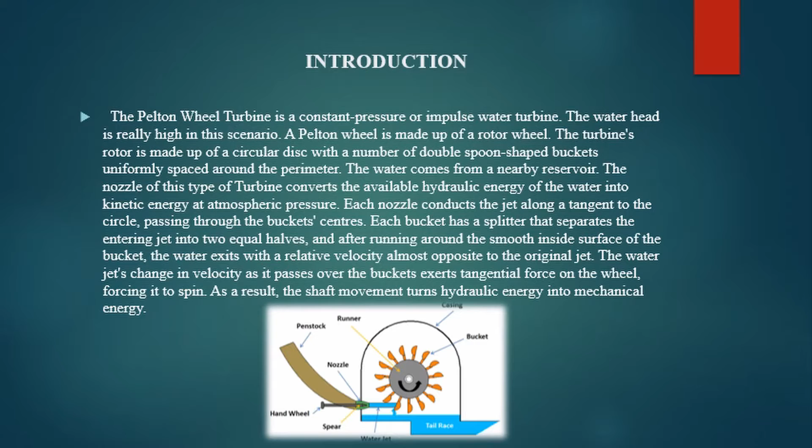For the background for this project, the UMP Fluid Mechanics Lab allows students to experiment with the Pelton wheel turbine. The goal is to expose the students to the Pelton wheel turbine's functioning component by varying the rotating speed while maintaining consistent head and flow conditions. A barometric weight is used at the channel and outflow.

Next, the information gathered will be analyzed and studied in order to arrive at a final conclusion that will validate the theory used for Pelton wheel turbines. And for the result, the findings of this study will provide students with a framework for selecting the best Pelton wheel turbine. The experiment is on a small size, but it employs the same principles as the Pelton wheel turbine used in real life.

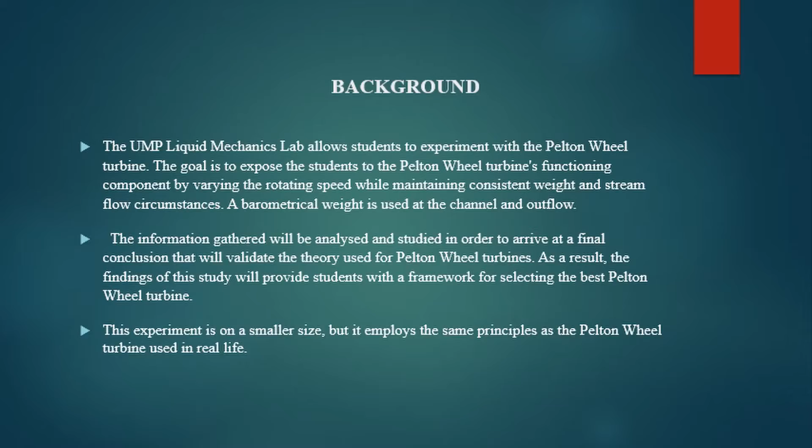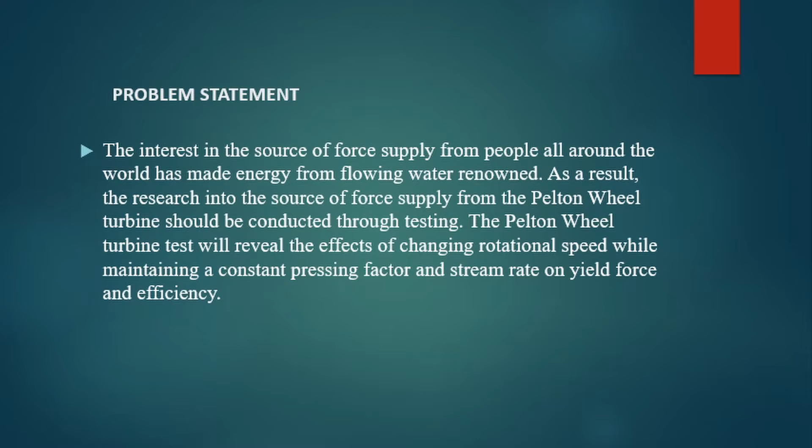And the problem statement is the interest in the source of force supply from people all around the world has made energy from flowing water renowned. As the result, the research into the source of force supply from the Pelton wheel turbine should be conducted through testing. The Pelton wheel turbine test will reveal the effects of changing rotational speed while maintaining a constant pressure factor and stream rate on yield force and efficiency.

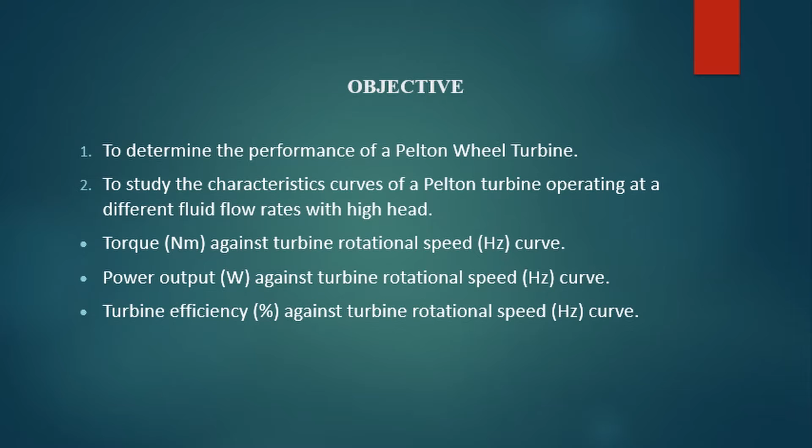And for the objective of this project, first to determine the performance of a Pelton wheel turbine, and second to study the characteristics curve of a Pelton turbine operating at different fluid flow rates with high head: torque against turbine rotational speed curve, power output against turbine rotational speed curve, and turbine efficiency against turbine rotational speed curve.

And for the scope, only a lab-scale Pelton wheel is used in this experiment. In comparison to a full-size Pelton which can create 100 million watts, this wheel would only create a little amount of electricity. That's all from me.

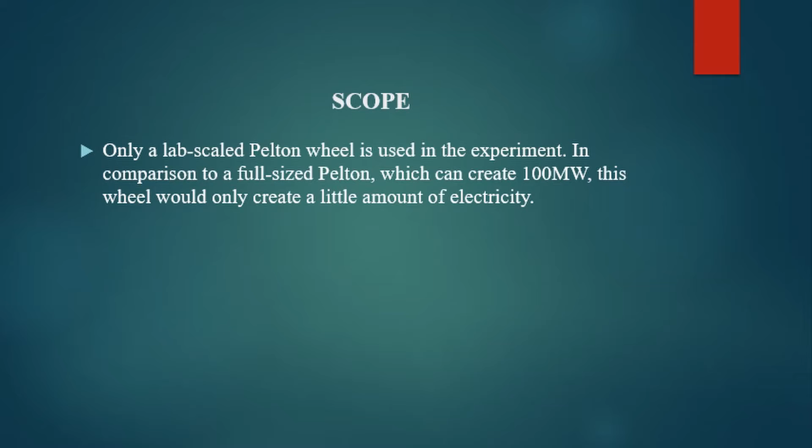So today I'm going to continue to present about the theory, method, and also the procedure. So we go through the theory first. So as we can see in the picture, the Pelton turbine is a hydraulic impulse turbine in which one or more water jets hit the buckets on the wheel. The force produced by the jet impact at the right angle to the bucket generates a torque that causes the wheel to rotate, thus producing the power.

The Pelton will need a source of water in order to run. If the head of the water is known along with the flow rate, then it is possible to find the best size of the wheel to use, how fast it should rotate to obtain the maximum efficiency, and what power it is likely to develop.

The velocity in the jet can be estimated by using the known fixed head. The diameter of the jet can be found from the known flow rate. A suitable wheel diameter can be chosen in relation to the jet. Typically, the wheel would have a diameter of 10 times the jet. The best speed of rotation may be selected such that the speed of the bucket is approximately half that of the jet speed.

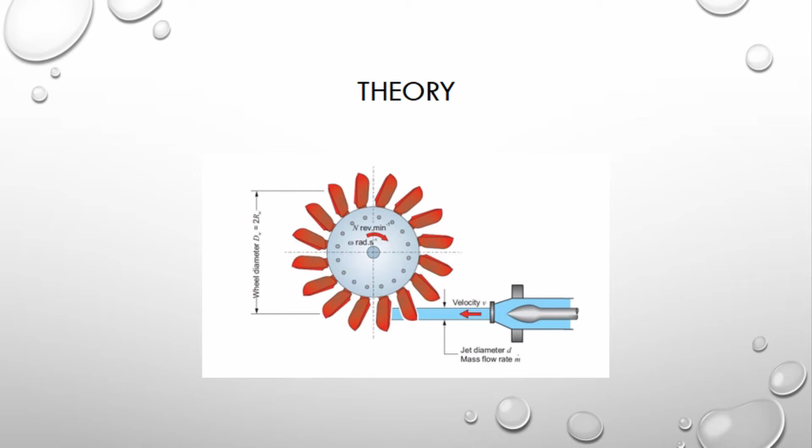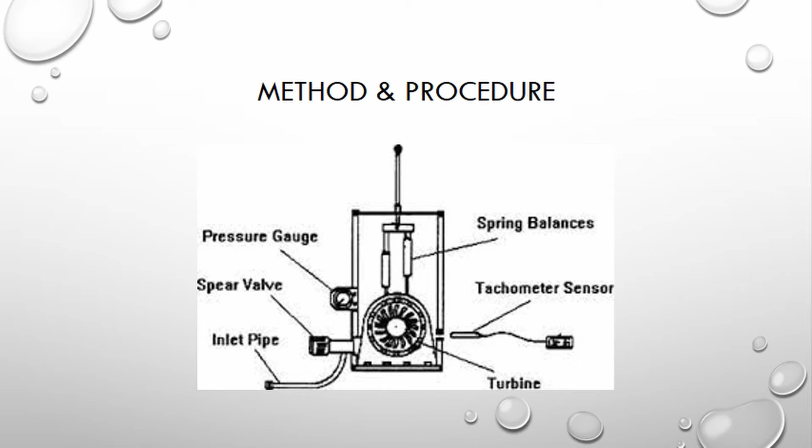So next we go to the method and also the procedure. So this is our experimental setup. We have a pressure gauge, spear valve, inlet pipe, spring balance, tachometer sensor, and also the turbine. So we go through the procedure one by one.

Firstly, prior to the beginning, every one of the water connections is checked so that there is no spillage in the hydraulic bench. Second, the spear valve is totally shut, which means we need to turn it completely clockwise. After that, start the hydraulic bench and progressively open the control valve while opening the spear regulator until the bench stream is at the maximum and the spear valve is completely open.

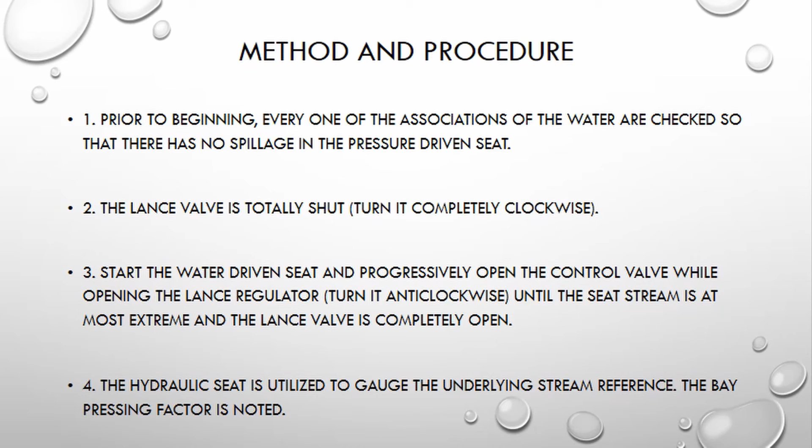Then the hydraulic bench is utilized to gauge the underlying stream reference. The inlet pressure is noted. After that, the tachometer is utilized to quantify the speed of the turbine. The tachometer is set against the clear glass at the rear of the turbine and it is utilized to identify the reflective sticker on the drum. The tachometer reading changes somewhat over time. The average rotational speed is assessed over the span of a couple of moments.

Then number 7, the volumetric flow rate is determined by stopping up the channel at the lower part of the bench. And number 8, the waterline on the bench is noted. The clock is started when the waterline arrives at 0 liters and it is stopped when it arrives at 10 liters. The volumetric flow rate is obtained by dividing the 10 liters by the time. Last but not least, the trial is repeated with decreasing RPM.

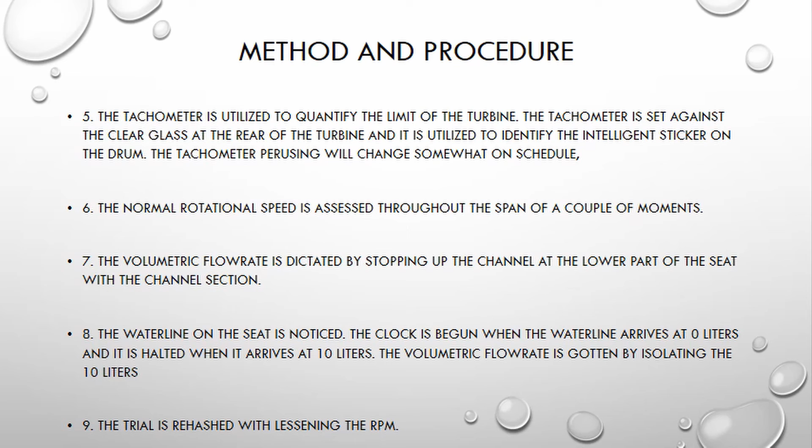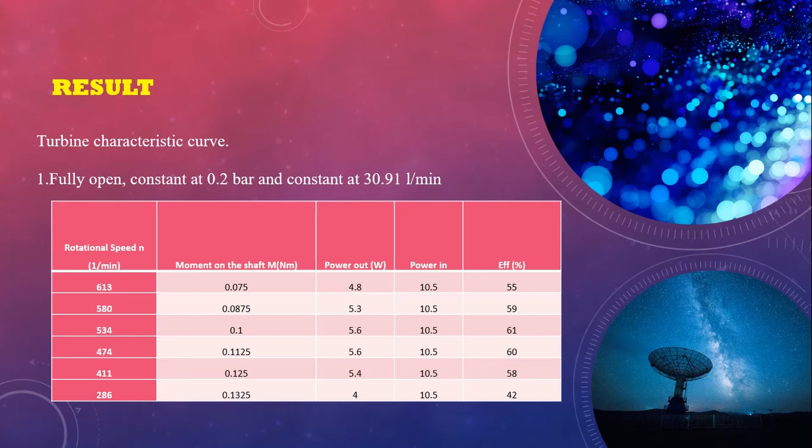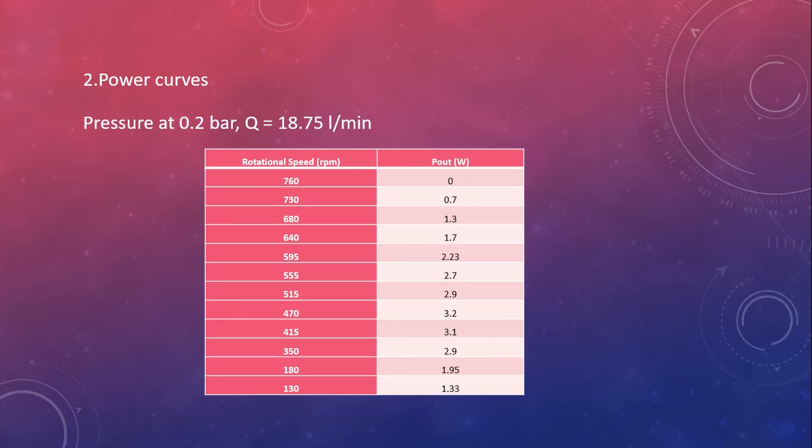Now I would like to explain the results and discussion. The first result is on the turbine characteristic curve, that is fully open, constant at 0.2 bar and constant at 30.91. The second table is about the power curve with pressure at 0.2 bar, Q equals 18.75. Now let's see the graph and discussion.

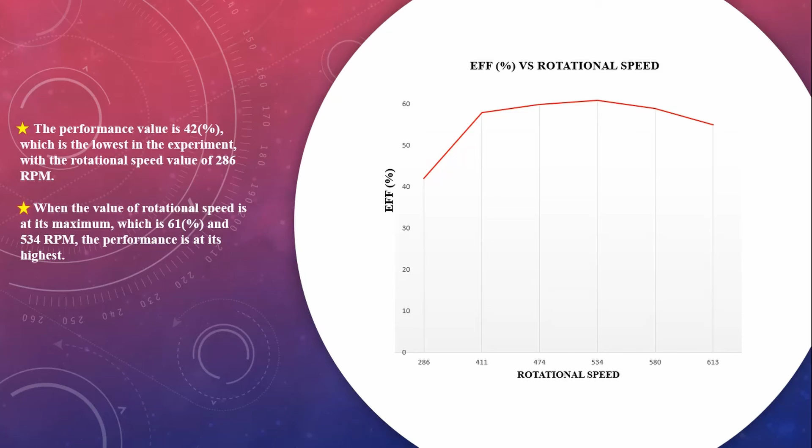This graph is basically efficiency versus rotational speed. The performance value is 42%, which is lowest in the experiment, with a rotational speed of 286 rpm. However, when the rotational speed is at its maximum, which is 61% and 534 rpm, the performance is at its highest. The second graph is on power versus rotational speed.

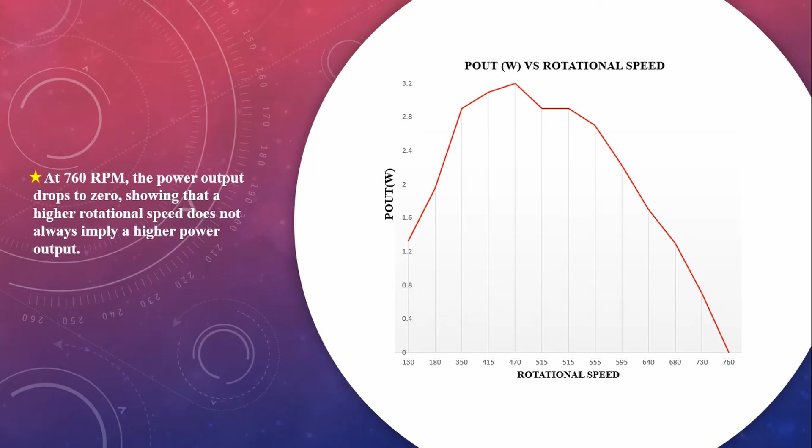The line is right skewed in the graph of power output versus rotational speed. The rotational speed is 470 rpm and the highest power output is 3.2 watt. Finally, at 760 rpm, the power output dropped to zero, showing that a higher rotational speed does not always imply a high power output. About the conclusion, we can conclude that